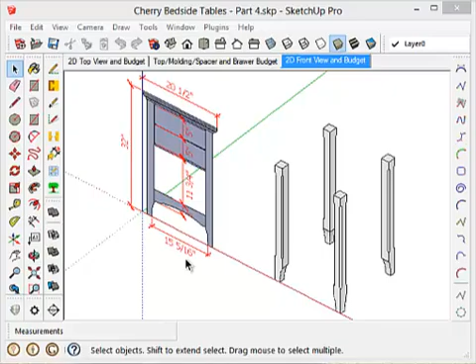So let's take a look at our 2D drawing of the front. And we'll zoom in here and notice a few things. One, the rail itself is 3 inches wide. And if I come to this point right here, the distance from that point to the top edge is 3.5. That means the rail is set up from the curve in the leg by 1/2 inch. So let's start with that.

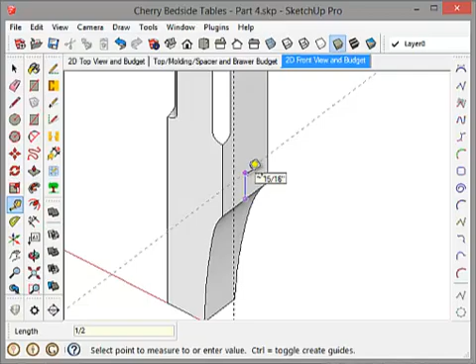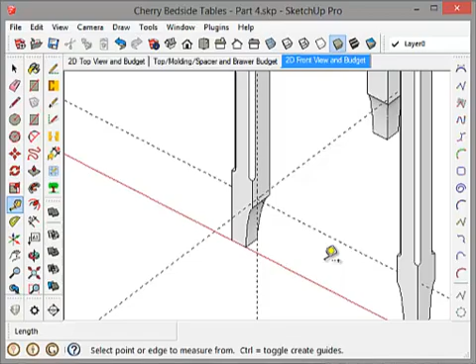Also, the rail is going to sit back in from the front edge of the leg so that it doesn't cover this shape right here. So what we'll do, first of all, is create a line 1/2 inch back from the front edge of the leg, and a line 1/2 inch up, and what I'm going to do is take a line parallel to the red axis going through that point right there. Now I'll make another parallel construction line up along the blue axis, and I may have to use the up arrow key. And I'll make that 3 inches.

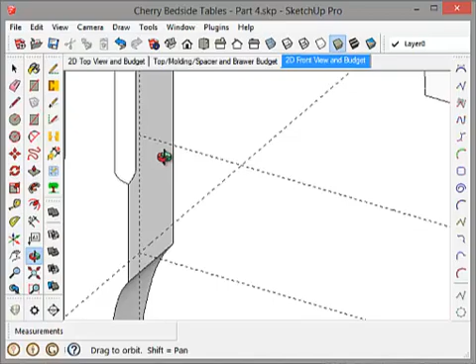So now, let me rotate around here. I'm going to use the rectangle tool. And where that point enters the leg, at that intersection right there, I'm going to draw a rectangle. It goes to that intersection point. All right, now that represents the front face of the rail. What we need is the curve in the bottom before we push-pull this. So let's go back and look at the dimensions here.

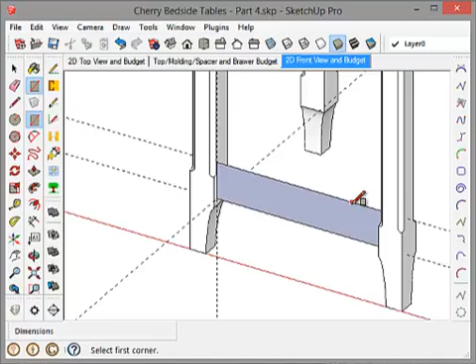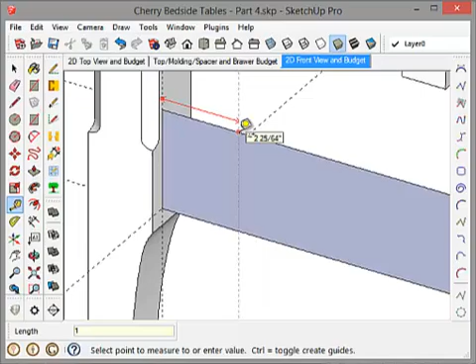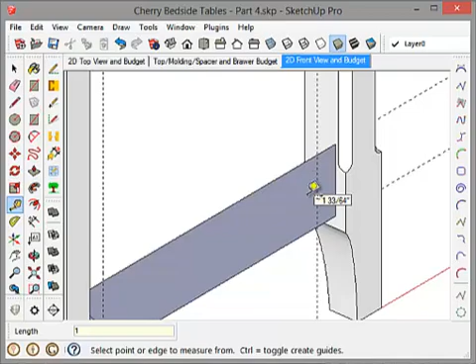The curve starts 1 inch out from either side. And it extends up 1 inch from the bottom. So let's put that in here. One inch from that side. One inch from this side. And 1 inch from the bottom.

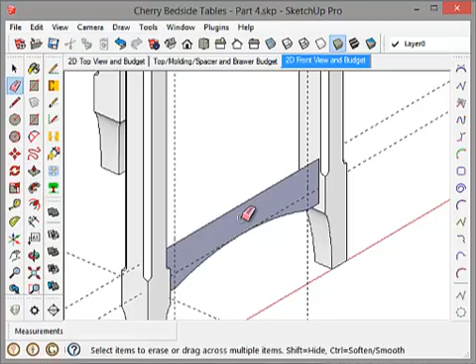And now we can use the arc tool. We'll start at this point down here, then this point, and then the midpoint. Notice that the VCB says 1 inch bulge. So we'll mark that, take the eraser, erase that. And now the rails are 1 inch thick. You can take my word for that, or if you look at the drawing of the dressers, you'll see that I'm going with the same dimensions for the rails that the dresser was made with. So I'm going to push-pull this back 1 inch. And there we go. We now have a bottom rail.

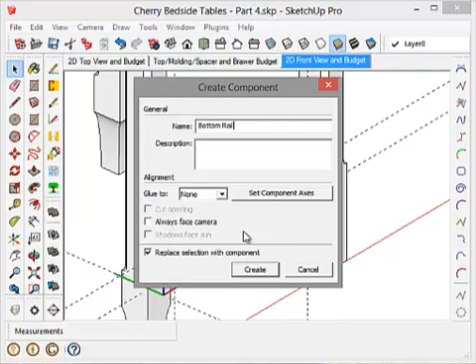So I'm going to immediately make it a component. Call it bottom rail. I can still edit it, which I will do because I have to put a dado in the top to accept the slats that will be vertical and sit into the dado. Now the dado is going to be 1/4 of an inch thick and 1/2 inch deep. So this is 1 inch wide. If I take 1/4 of an inch from 1 inch, that's 3/4 of an inch, so I have to bring it in 3/8 of an inch from each side. So I'll do that now.

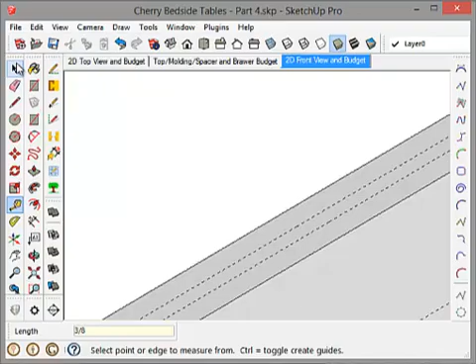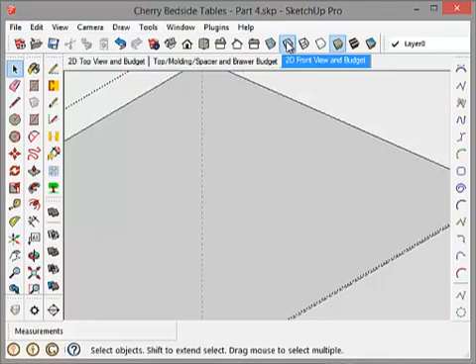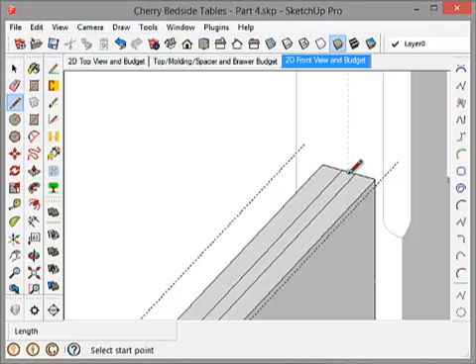Now I'll go into edit component mode. I can barely see that line, but let's see. There we go. That's a better view. I'll start here at that intersection. Down to here. And now I'll use the push-pull tool. Bring that down 1/2 inch.

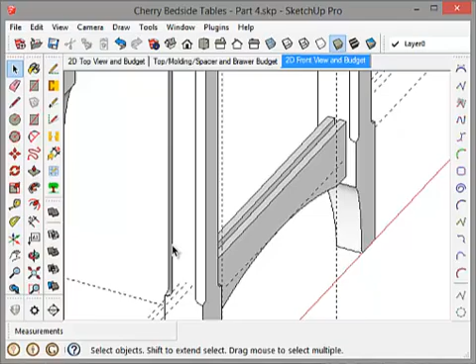Okay, we'll leave it at that for now. I'll worry about the joinery later. Let me just get all the rails in here. So that's the front rail. I'll get rid of some of these construction lines. The others might be useful. Okay.

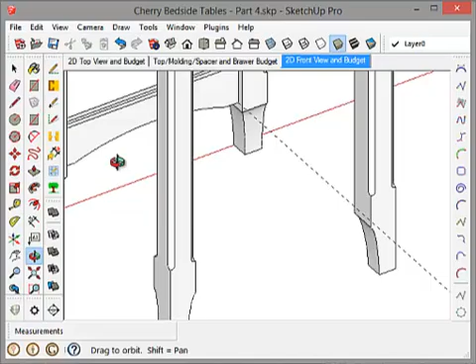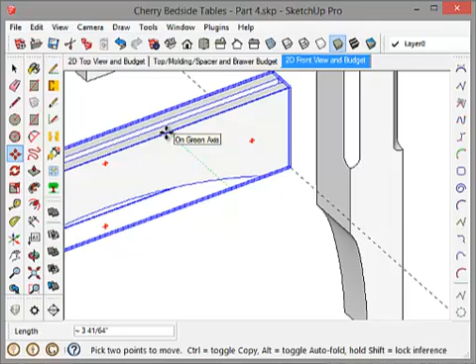I'm going to pick up this component with the Move Copy tool. Then I'm going to move it back here, right at that point. But now I've got to move it in 1/2 inch. So I'll just move it back along the green axis this time, 1/2 inch. And now that one's in place. I need to copy it. I'll move it out along the green axis. And I'm going to use the rotate tool. Rotate it 90 degrees.

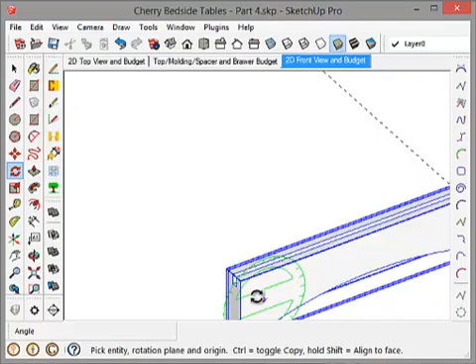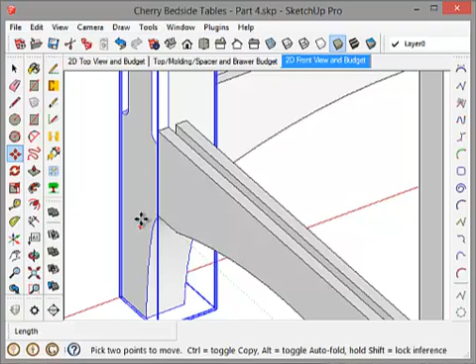And we'll move it into place. I'm going to start by moving it right. Well, let me see. I've got to get up here. Right there, I think. Let me just make sure. Yep. And now I want to move it back 1/2 inch and up 1/2 inch. So I'll start back first, along the red. And I want to move it up 1/2 inch along the blue. Now that one's in place. Now I'll do the same thing. I'll copy it over to this side.

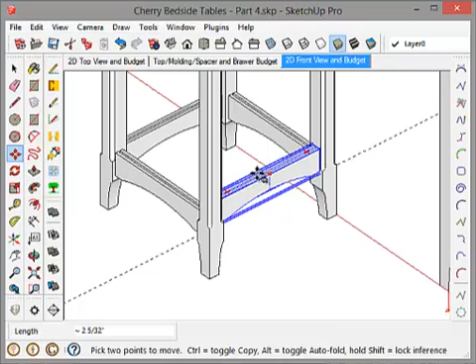Move it back 1/2. Move it up along the blue axis. I'm going to use my up arrow key here. There we go. 1/2 inch. Now that one's in place. All right. That takes care of the bottom rail. Let's look at what we have here.

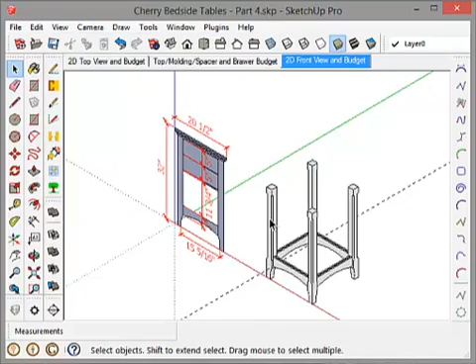Now the top rails are going to be a little different. There's not going to be a defined large top rail for the front. However, the sides are going to look very much like the top rails on the dresser. So we'll take a look at that. The top rails on the dresser have no curve. They're just 3 inches wide and 1 inch thick, and extend between the legs, with a dado on the bottom this time. So let's do that.

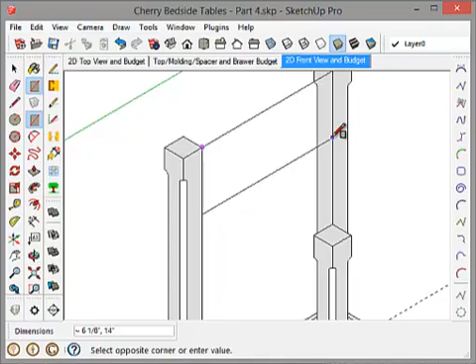I'll start this time with the rectangle tool. I'll start here. And I'm going to go out to this edge, and I'll look in the VCB, and I'll notice two numbers. One says approximately 6 1/8, comma 14. The 14 is actually the correct dimension. It's the length of this rectangle. The 6 1/8 should really be 3 inches. So I'm going to type 3 comma. That's all I need to type, and it gives me the correct dimension for the rectangle I want.

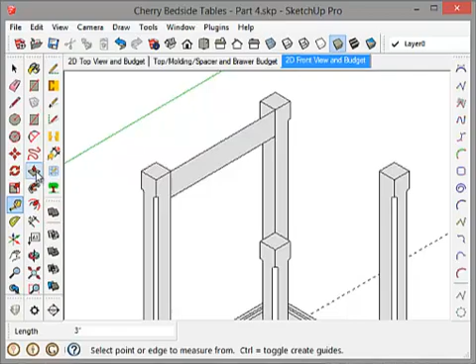Just to be sure, it's 3 inches. And now we'll give it its thickness of 1 inch. And at this point, we might as well go on to the bottom and put the dado in. Start with this edge and move over 3/8, and then move this edge 3/8, and we can now begin to draw our dado in.

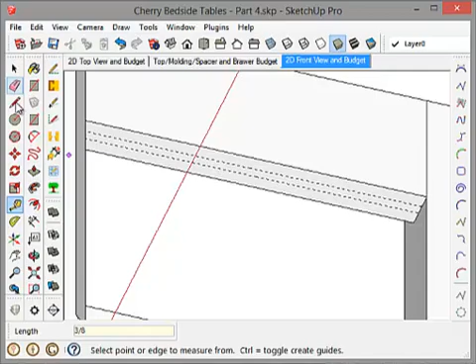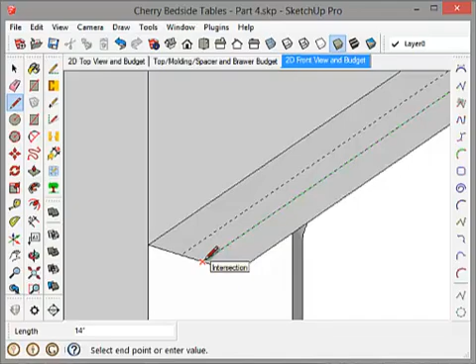I gotta turn that a little more. There we go. I'll turn this back. And we'll push that up a 1/2 inch. Okay, so there's our dado. We can now make this a top rail.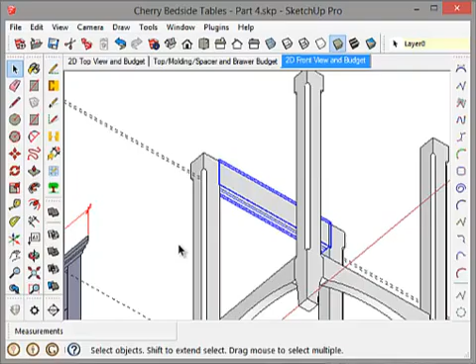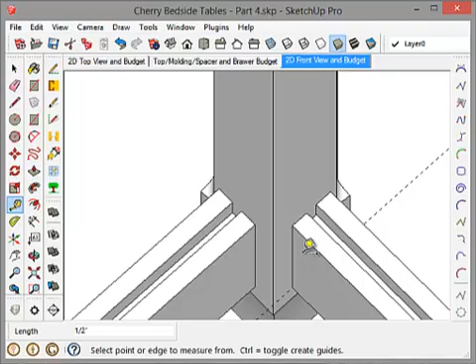And it has to line up with the bottom rail. And we'll notice that the bottom rail is set in 1/2 inch from the back edge. And that's also true here. 1/2 inch. So we'll do the same to this. Go out 1/2 inch. And I'm going to copy this. Move it over 1/2 inch.

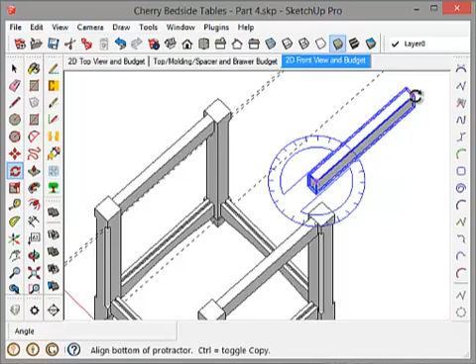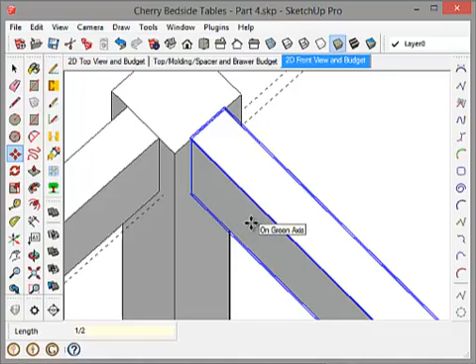And I'm going to copy it one more time. Rotate it 90 degrees. Now move it into place. Move it back 1/2 inch. There we go. Now we have all the rails in place. Let's just inspect things here a little bit. All right, so now we're ready to put

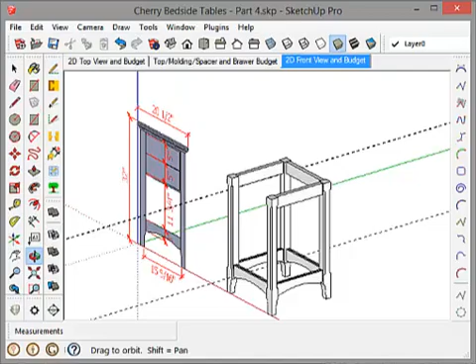our slats in place. I'm going to shoot for about 4 slats on each side. So I have to do a little calculation. I'll go offline here for the moment and see what that looks like. Okay, I went offline and I did some calculations. The most important thing I need to worry about here is the expansion of these slats, seasonal expansion.

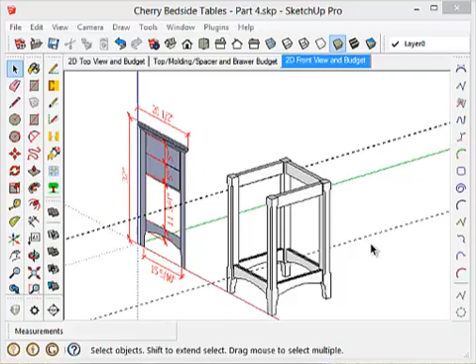And I used my calculator, this little calculator right here, called Wood Expansion Calculator, and calculated that a nominal 3.5 inch cherry slat will expand about 3/64 of an inch, or change totally, seasonally, about 3/64 of an inch, which is approximately 1/16. Now, where did I get the 3.5? Well, it's 14 inches. Let's just look here. From here to here is 14 inches, and I want to put 4 slats in there. So they'll be nominally 3.5 inches each.

If I want to put a 1/16 inch gap between the slats, and I want the gaps to be equal on all sides of the slats, that will mean that there's going to be 5 gaps, each 1/16 of an inch. So if I subtract 5/16 of an inch from 14 and divide it by 4, I will get a slat that's nominally 3 27/64 of an inch wide. So let's start with that. 3 27/64 of an inch wide. Now let's find out how long they have to be.

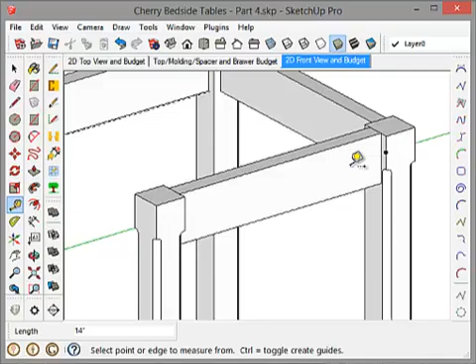Okay, 19 3/4 by 3 27/64. So again, I'm going to go off to the side here. And I'm just going to type in 3 27/64, comma, 19 3/4. And I've got the dimensions in the wrong order, so I'll just type 19 3/4, comma, 3 27/64. There we go. And I'm going to make these 3/4 of an inch thick. I'm going to bring it out here a ways so I can work on it.

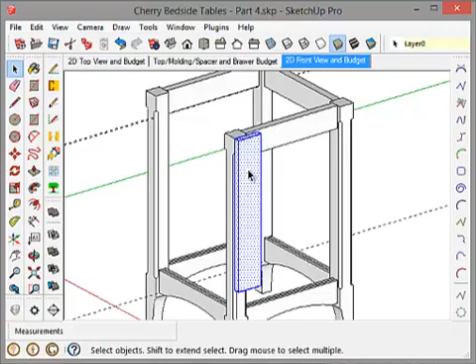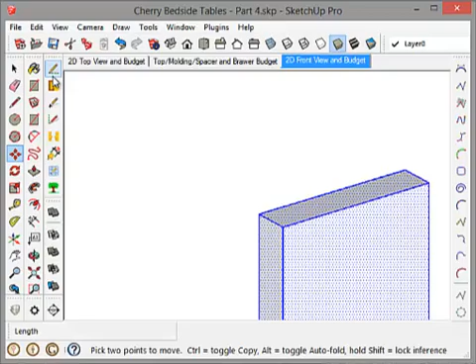All right, now I want these beveled a little bit on the edge so that they will look nice. But that's something I can do in a moment. Let's put the tongue and grooves on it. Recall that the top and bottom rails have grooves in them, dados, to receive some tongues. And we're going to make those tongues a 1/2 inch high. So we'll come out here like this, come over 3/8 of an inch, another 3/8 here,

Whoops, sorry. I'm having a really bad morning here.

I don't want that 3/8 of an inch, I want it a 1/4 inch. And a 1/4 inch here. And now I can create my tongue and bring it up.

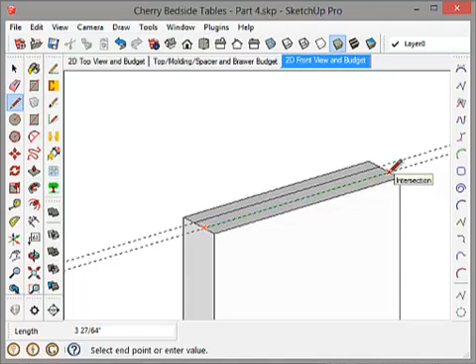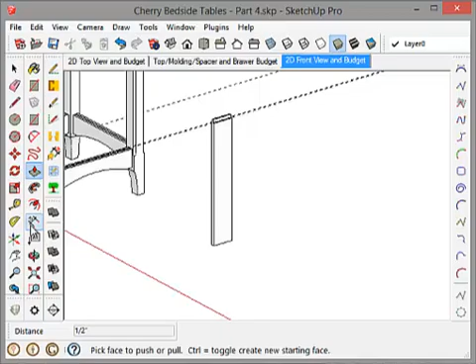I have to do the same thing on the other end. So I think what I'll do is just create some more construction lines here, 0 offset from this line. And I can come down here. Look at the bottom.

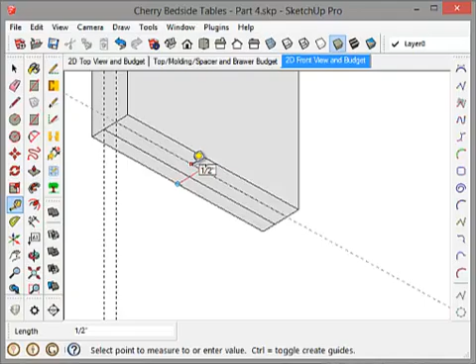Extend these along the green to that edge. There, that shouldn't have said midpoint. I'm not sure, just want to make sure I got this right. 1/4, 1/2, 3/4. Okay, we got it right. And we'll extend this down a 1/2 inch.

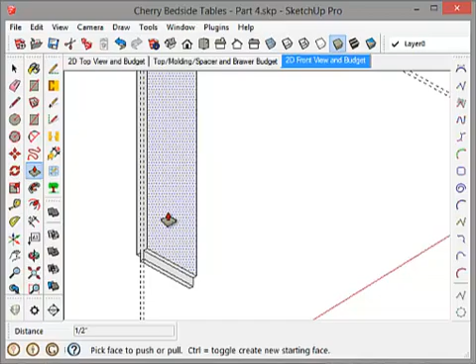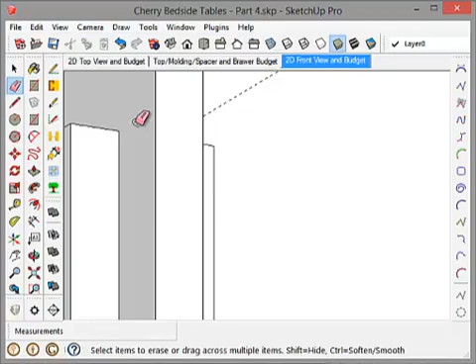Now, these slats are going to be tongue and grooved together. So one side of them has to have a tongue, also a 1/4 of an inch thick, but this time, instead of a 1/2 inch, I'm going to make them 3/8 of an inch. So let me do that. Come out 3/8 of an inch. And we get some erasing to do here. On both sides.

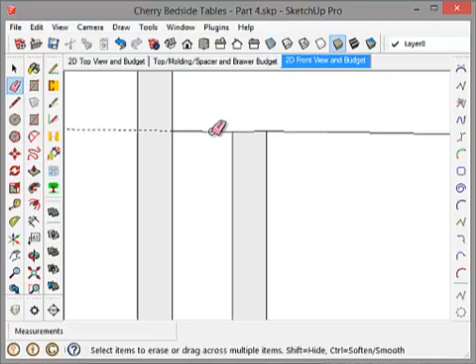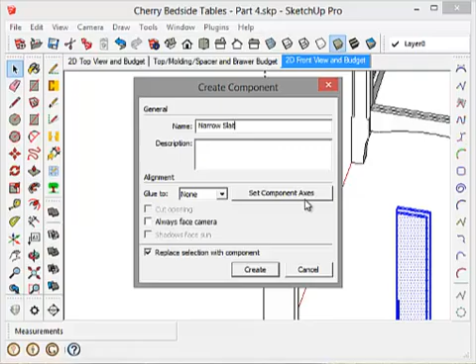And for a moment, I'm going to ask you to trust me that I know what I'm doing. There's going to have to be 2 types of slats. One with a tongue on both sides and one with a tongue on one side and a groove on the other. So I'm going to copy this and move it over for the moment. I'll move it along the green axis. I'll make it a component, call it wide slat. This one I'll call narrow slat. And you'll understand why in a moment.

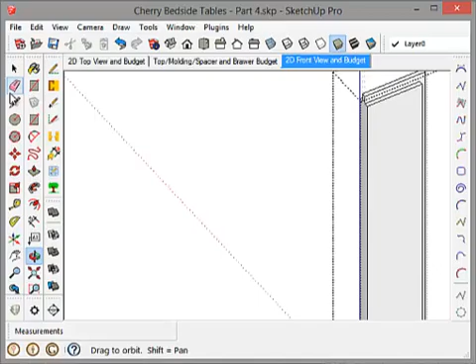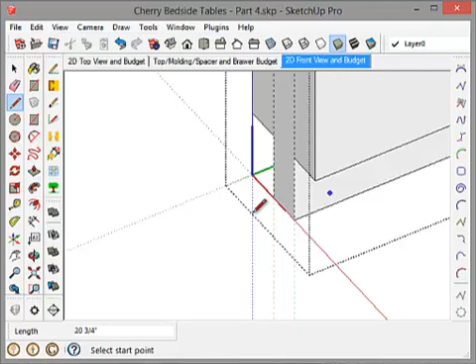I'm going to edit this one. I might be able to save myself some erasure if I do this. Ran into a little problem there. Nope, I still have an erasure. But I'm going to bring this out 3/8 of an inch. Do all my erasing.

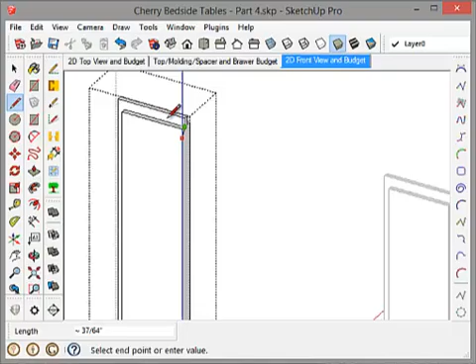And now in this one, I'm going to edit it. I'm going to put a groove instead of a tongue. And the groove is going to be 3/8 of an inch.

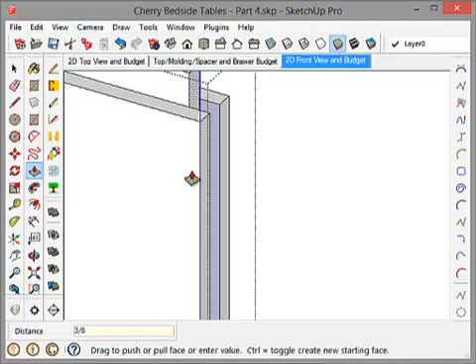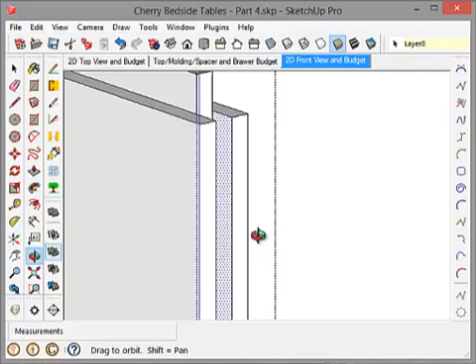By the way, might as well correct the surface here. Might be a little nitpicky, but if you're going to texture these, then you're going to want to do this. Okay, now I've got my two types of slats, and I'm going to put them in place. Actually, first of all, let me get rid of a whole bunch of construction lines.

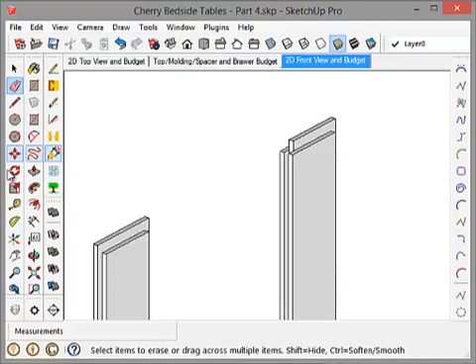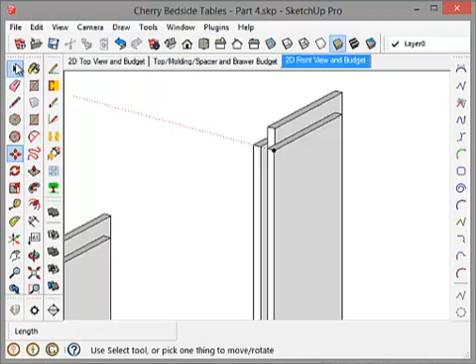Recall that I wanted a 1/16 inch groove between these, so I'll copy this. Let me move this one out a 1/16 of an inch. That gives me a slight gap there of a 1/16 of an inch to allow for expansion. I'll copy this one, then move it back out along the green 1/16 of an inch.

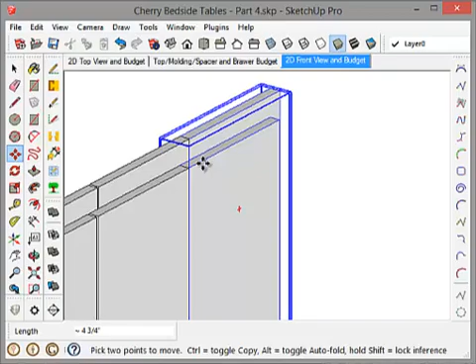And lastly, I'll put this one in place. I'm sorry, just move out 1/16 of an inch for my last gap. Now I've got the side. And one of the very few times that I will use a group is right now. I'll make this a group. I don't care what the name is. But now I can move it as a group.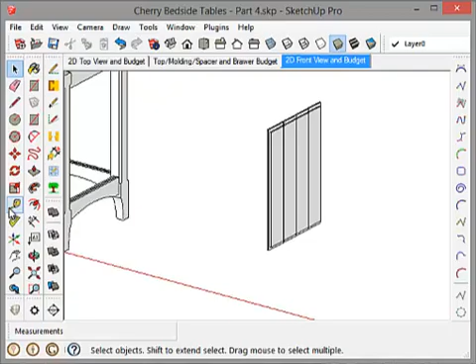By the way, let's just take a measurement here. See what we have. From here to here, it's 13 7/8, 1/8 inch short of 14, or 1/16 allowed on both sides for a space. So here's what we will do. I'm going to put this in place, but before I do, I'm going to copy it twice.

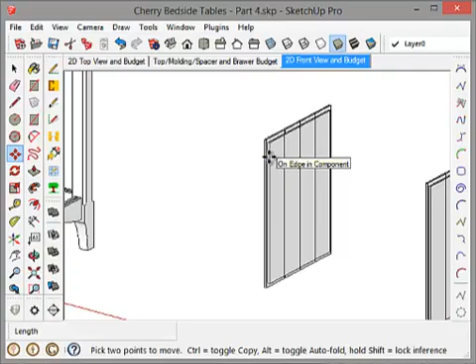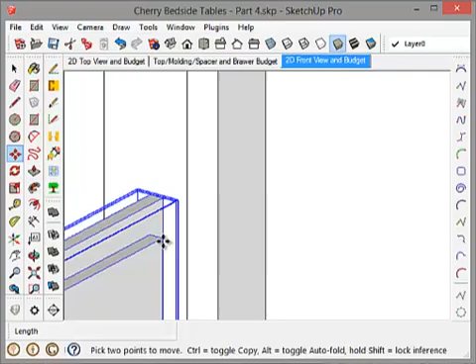Now let me start with this one. I'll put it in place right there. I'm going to want to move that a 1/16 of an inch this way along the green. And I'm going to want to move it back 3/8 of an inch. That should center it in my rails. And it looks like I got it right.

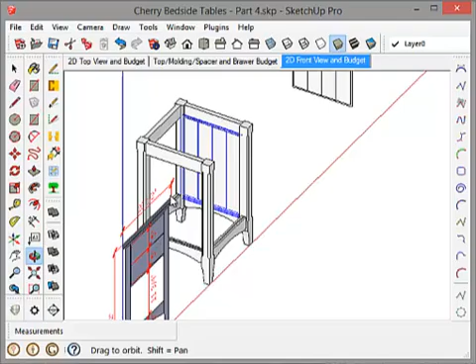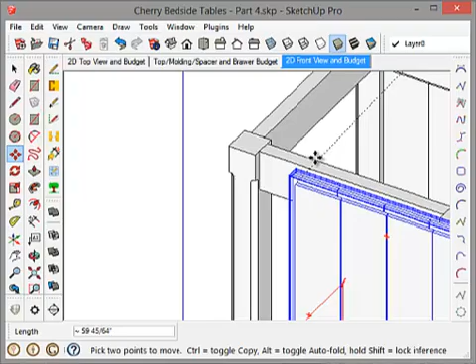All right, so while we're at it, we'll put the other one in place. I've got to move it a 1/16 of an inch this way. Three-eighths of an inch that way. I'll put my last one in place. But before I do, I have to rotate it 90 degrees. Use the shift key to keep my orientation for the cursor.

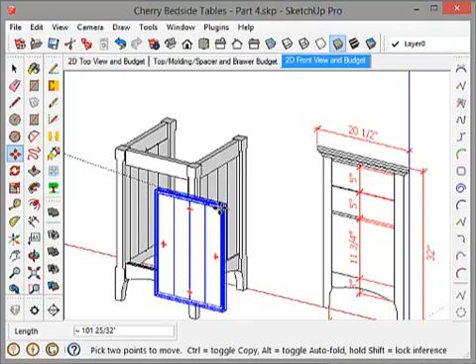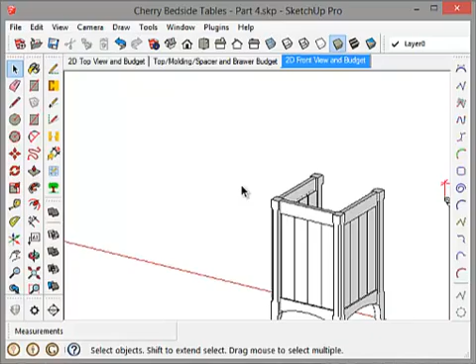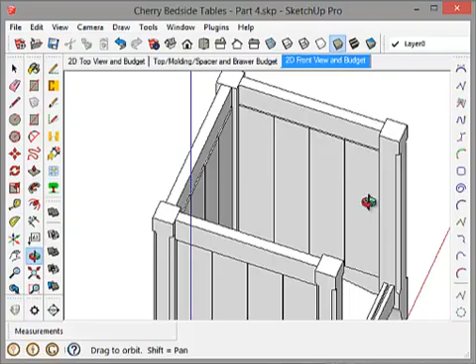Sometimes these are difficult to get in the right spot. All right, I'm going to move it 1/16 of an inch. I'm sorry, 3/8. And 1/16. Now I think I noticed something that didn't look right. That doesn't look right. One of these is off. They're all off. So my calculation was wrong.

My calculation was wrong. I moved them 3/8 of an inch. The rail is 1 inch wide, and the slats are 3/4. 1 minus 3/4 is a quarter, divided by 2 is 1/8. So I should have moved them 1/8. So what I can do now is just move them all out 2/8. There you go. That's better.

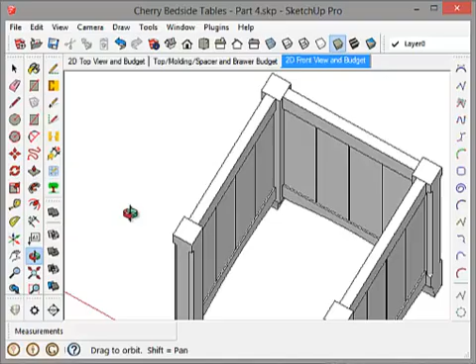All right, this has been a pretty long video to this point. So instead of worrying about the joinery this week, we'll call it quits. Next week I'll come back and we'll catch up with the joinery for all of this, and probably put the top and bottom rails here and get ready for the drawers. So let's call it quits and catch up next week.